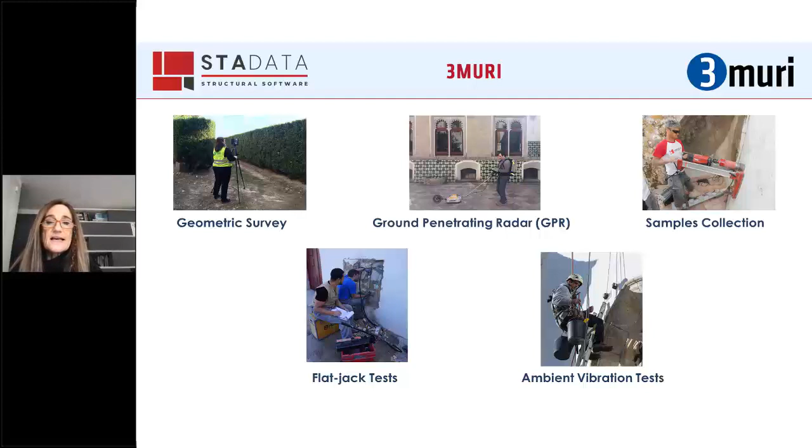And for the experimental campaign, we started with a geometric survey with a laser scanner and a Falcon 8 Plus drone. We have performed ground penetrating radar surveys, sample collection for the masonry, flat jack tests, and ambient vibration tests.

From the point clouds obtained with the laser scanner and the drone, a 3D BIM model was developed in Revit, which includes, beyond the geometry, obviously, attribute data of various types assigned to each of the elements of the BIM model. So we have included in the final model historical documentation, description of materials, construction stages, information from experimental in situ tests, and even the main outcomes from the seismic assessment analysis that we have performed in all the palace.

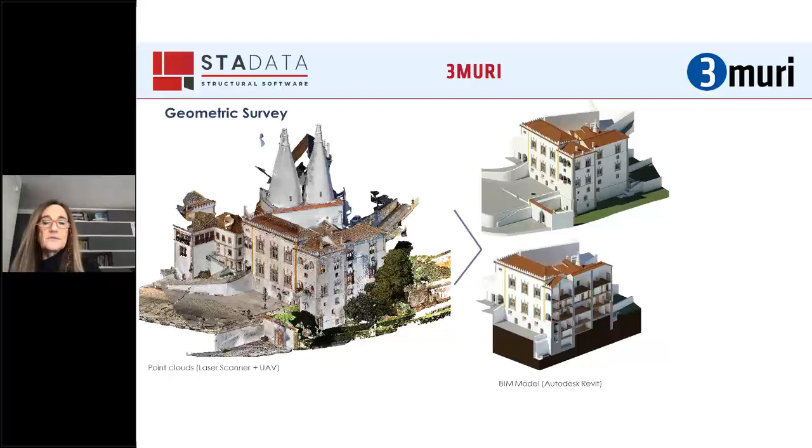In this slide, you have only one wing of the palace, the Manueline building, and a cut and the 3D model represented on the right side of the slide. So from the laser scanner of the outer and inner surfaces of the palace, it has been possible to obtain an incredible 3D definition of the geometry of the structure. And to illustrate this, just some results of these outcomes.

So what we have is the complete geometry of the two massive conic chimneys that we have in the palace, the possibility to be sure about the thickness of some walls which connect different parts of the palace, just to illustrate the chapel and the kitchen, where the width varies completely along the length of the wall, or to detect some curved walls that it was impossible to get from other surveys without using laser scanning.

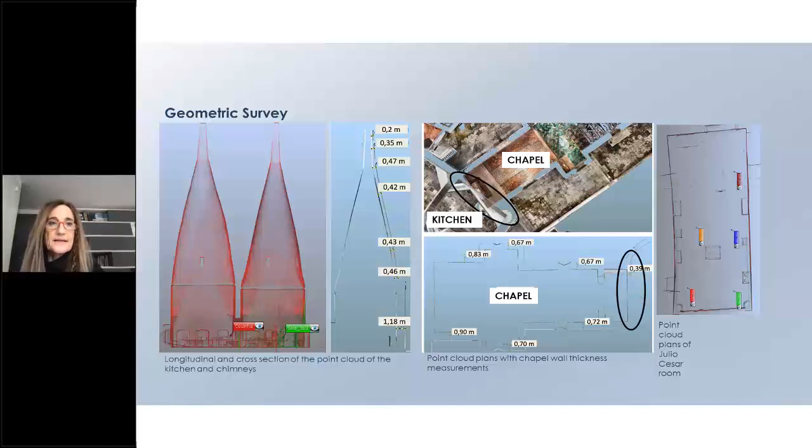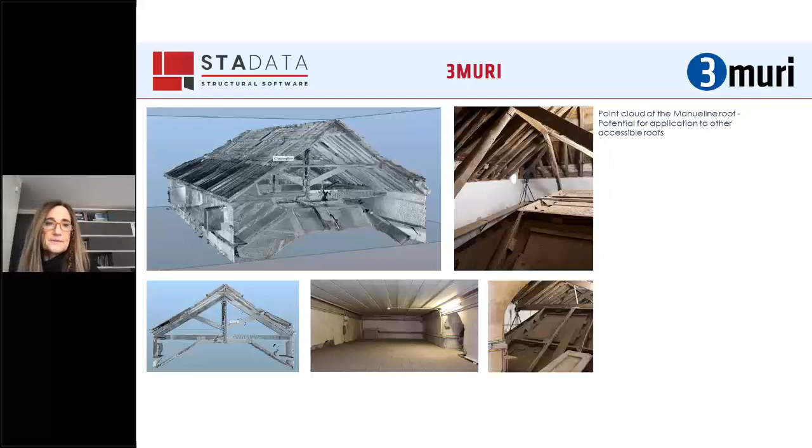And I'm completely sure that obtaining the correct geometry is crucial for the calibration of numerical models and for the adequate seismic assessment and seismic performance of this type of structures. Thus, for this type of complex masonry buildings, I think this is the correct way to get the geometric properties of the structures.

As far as the GPR survey is concerned, we have performed these tests not only in some of the walls where we have removed some samples, but also in all the pavements with vaults, just to be sure if they are infilled or not. And in some walls that were built against the rock, just to be sure how the connection was between the wall and the soil and the rock.

We have used different frequency antennas, and with these we were able to get some important information and to discover some construction techniques, some types of materials, anomalies like the presence of voids, cracks, or even water.

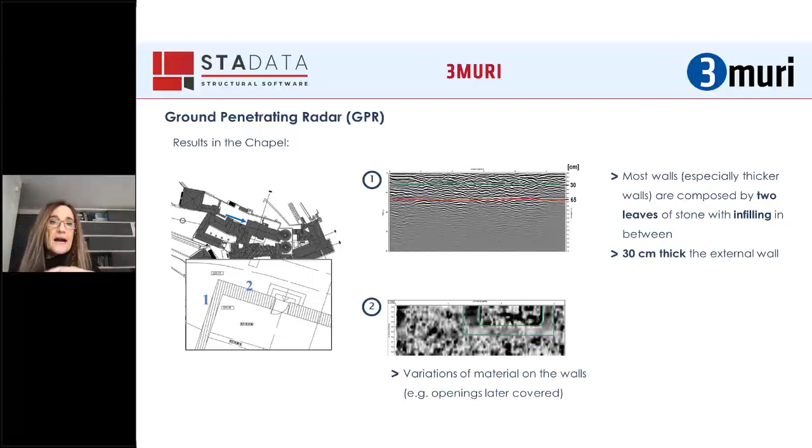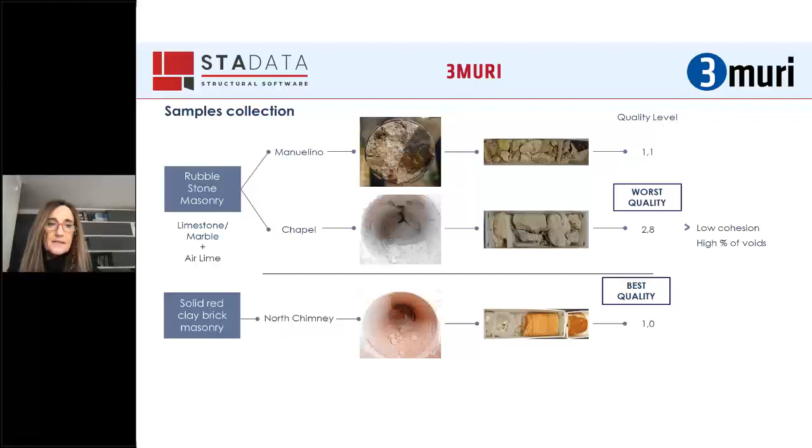For the characterization of masonry, we started with some sample collection. So it's a qualitative characterization, of course. The location was chosen on the main structural walls that characterize the principal periods of construction of the palace, of course, being aware of the countless limitations that we have in a palace, because of the existence of tiles, of paintings, so it's rather tricky to choose the place to get these samples of masonry.

The flat jacks were carried out preferably in the same walls where we have removed the samples of masonry, and if not possible in the same wall, in walls very close to the walls where we have removed the samples of masonry.

And the objective was to characterize the mechanical properties of masonry. It is worth mentioning that the inspection windows that we obtained before carrying out the flat jack tests allowed us to proceed to the masonry qualitative evaluation. So it was really very important for the qualitative evaluation of the masonry.

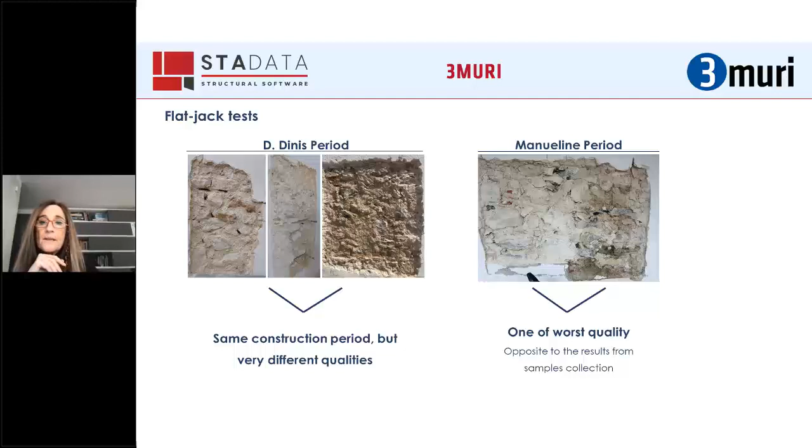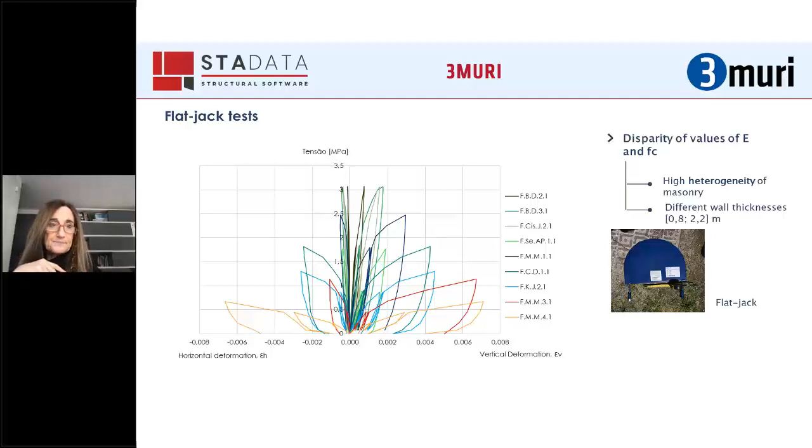A campaign of ambient vibration tests was performed in some of the palace bodies, chosen for their structural importance, existence of damage, and history. These tests allow us to identify the dynamic characteristics or dynamic properties, frequencies and modes of vibration, which in turn were crucial for the numerical calibration of the models.

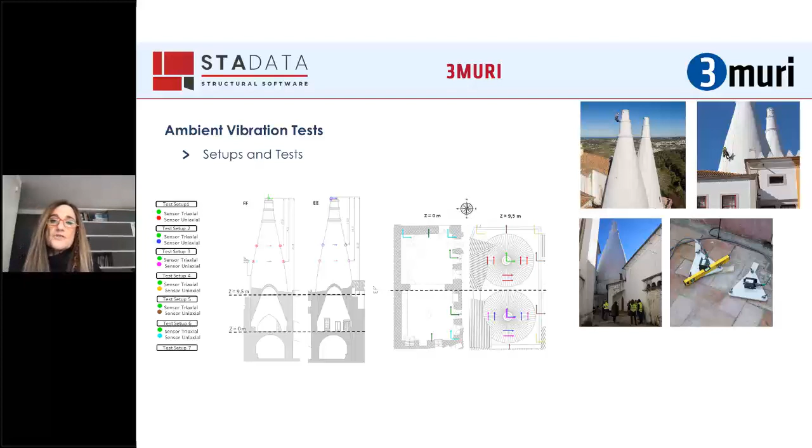The locations of the experimental in situ tests were represented in the BIM model. So you have here the plan view of the Manueline building, and the main results obtained linked to the model or added to it as attributes. So we have here some images of the Manueline building and the tests that we have performed in this building.

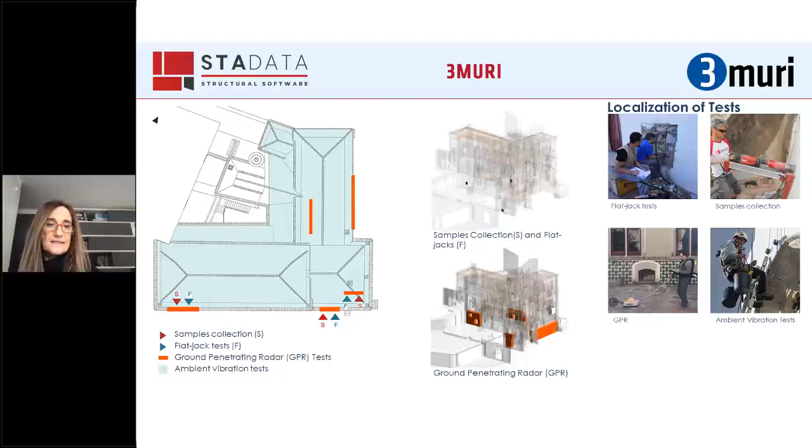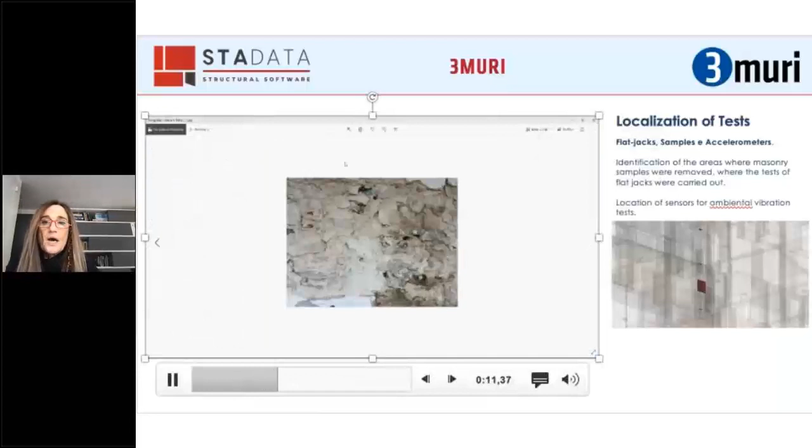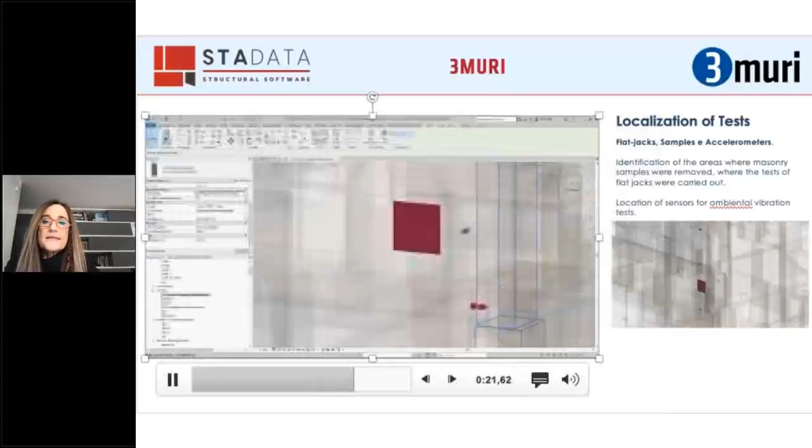This film shows how the information related to the masonry samples, flat jack tests, and the ambient vibration tests have been inserted linked to the BIM model. We have the identification of the areas where the masonry samples were removed, where the flat jack tests were carried out, including some photos and the main results reached. So for instance, for the ambient vibration tests, location of the sensors and the modes of vibration have been considered and included in the BIM model.

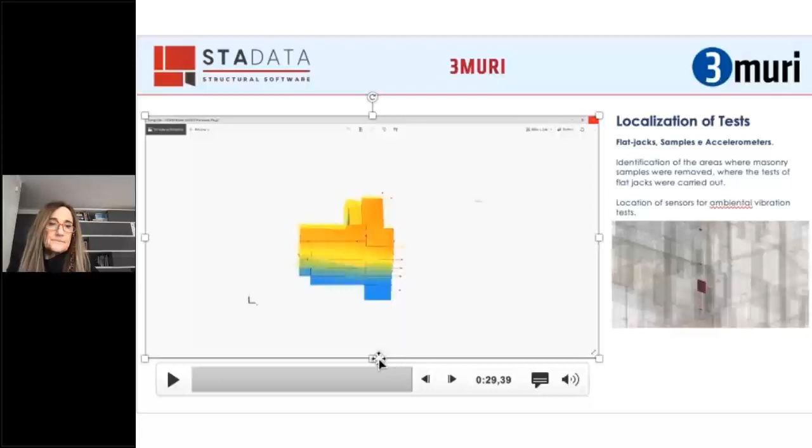In the BIM model, all the floors and walls where the GPR tests have been performed were identified, and it was really important, and the main results as well. As you can see here, linked to the BIM model, the report with the main results of these GPR tests.

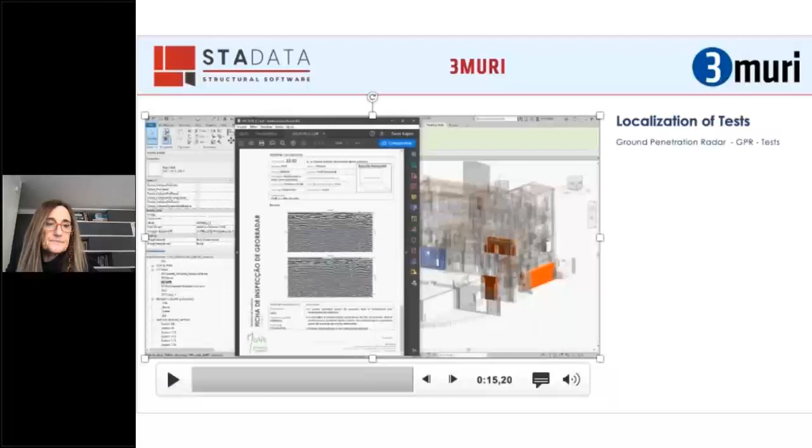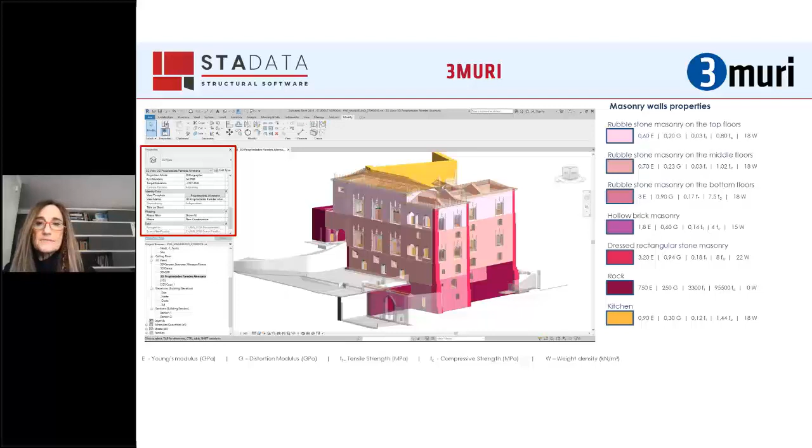So let's move now to the definition of the seismic assessment itself and numerical modeling of the palace. The definition of an effective nonlinear model for the seismic analysis of masonry structural elements represents a crucial step, as you know, towards a proper seismic assessment of existing masonry building structures. For the seismic assessment of the palace, we have considered the in-plane and out-of-plane responses of the masonry, and we have performed nonlinear analysis.

Considering the size and complexity of the palace under study, where this figure is really illustrating the complexity of the palace, I do believe that the macro modeling approach is the tool applicable to large scale computations. Thus, in this study, the seismic behavior was assessed by performing nonlinear analysis through the 3Muri program. This palace, as I have already mentioned, is characterized by an aggregation of bodies, quite clear in this image, intensely affected by their dynamic interaction due to the shared boundary conditions. You have all the buildings sharing with each other some boundary walls. The structural model, of course, needs to consider the effects of those interactions.

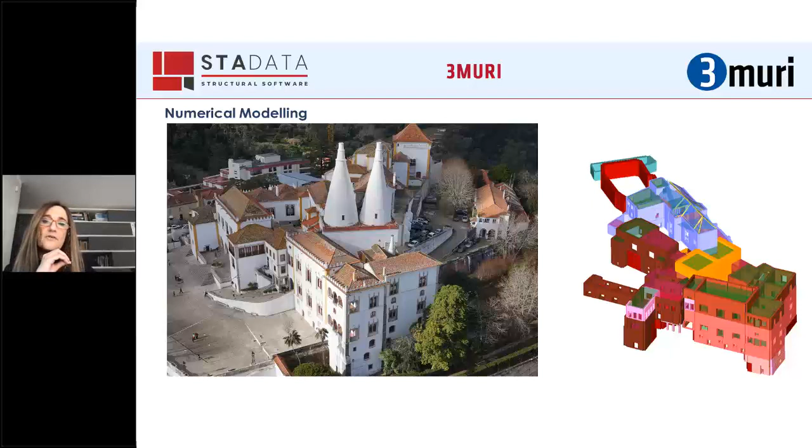At the beginning of our study, a unique global model of the whole palace in the 3Muri program started to be developed, but due to the structural complexity and dimension of the palace, developing a unique model proved at that time to be computationally demanding, and we got significant convergence problems, and it was almost impossible to calibrate our model based on the experimental results with a unique model. So we decided to give up. In the right side of the slide, you can see the model when it was decided to stop the development of a unique model of the palace.

Therefore, separate models were developed and calibrated, considering all the time the effect of the adjacent buildings and taking into account the field survey and results of the experimental campaign, mainly the ambient vibration tests. They were crucial for the calibration of the different numerical models. So we have the identification of all the bodies that we considered in this study with the names that we gave to all the bodies.

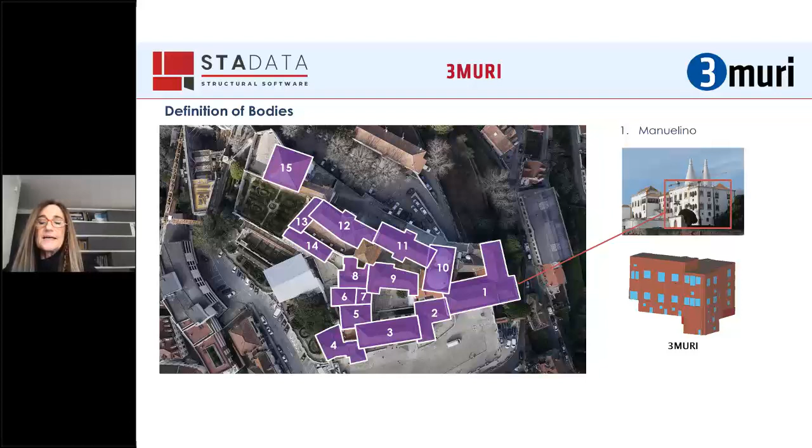I have to say that among all these units, unit 1, the Manueline building, and unit 10, which corresponds to the kitchen with these two high chimneys, were the most challenging ones, and this was due to different reasons. So if we move to the Manueline building, I have to say that this challenge was mainly due to the dimension of the building, irregularity in plan and in height, different levels, walls without continuity in height. So these were the main reasons why it was so difficult to reach the final model of this wing of the palace.

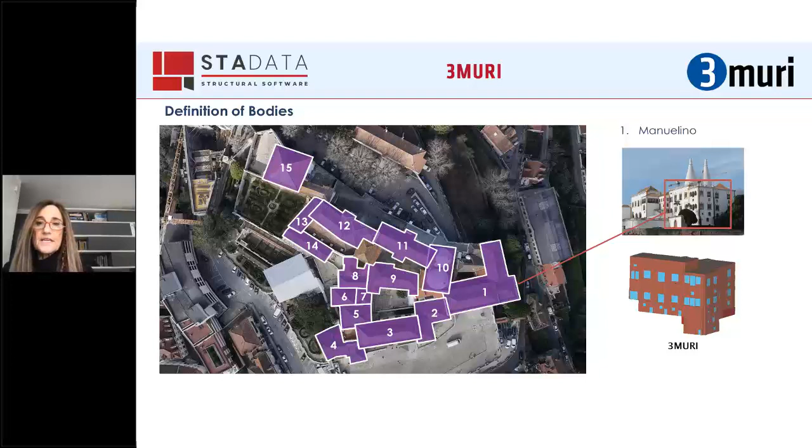For the kitchen, the unit 10, this is mainly due to the presence, of course, of the two massive chimneys with a conic configuration. In this case, we have used different softwares. We start with SAP 2000, and the main reason was trying to have a preliminary outcome, a preliminary dynamic characterization of the building and of the chimneys, because this was rather important to perform the ambient vibration tests and to define the correct localization of the sensors in height. So basically, this was the purpose of developing a SAP 2000 model.

Then 3Muri was used, but for 3Muri, of course, we have modeled only the effect of chimneys in our building numerical model. We have considered all the masses that we have due to the presence of these massive chimneys, and the Abaqus later, of course, because we want to study the behavior of chimneys and to get the damage pattern for different seismic intensities of the chimneys, and this was not possible with 3Muri.

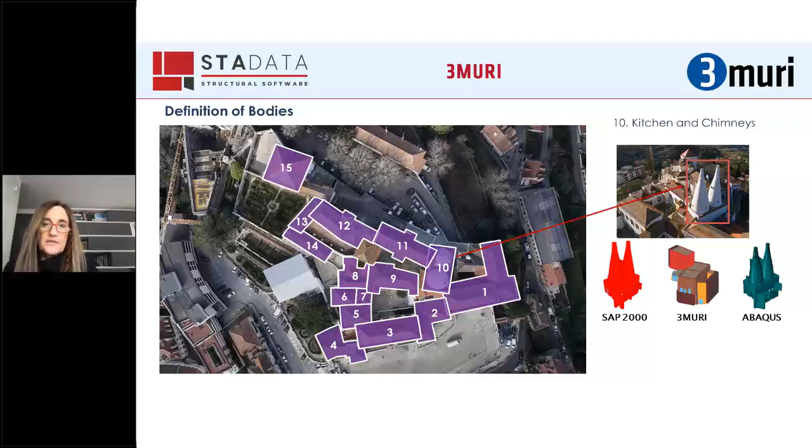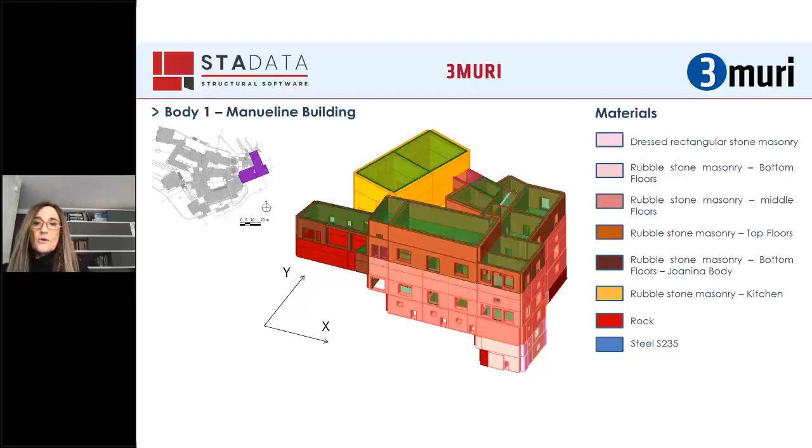For the global seismic assessment, taking into account the in-plane behavior of the walls, we have performed nonlinear static analysis with the 3Muri program. So in this slide, it is represented the damage pattern for the ultimate displacement of pushover analysis for the load applied in both directions, X and Y directions. In fact, the distribution of damage of different masonry walls is represented for the near collapse limit state. This extreme situation allows us to identify the most vulnerable structural masonry walls and the type of behavior that we are expecting, shear or bending controlled behavior.

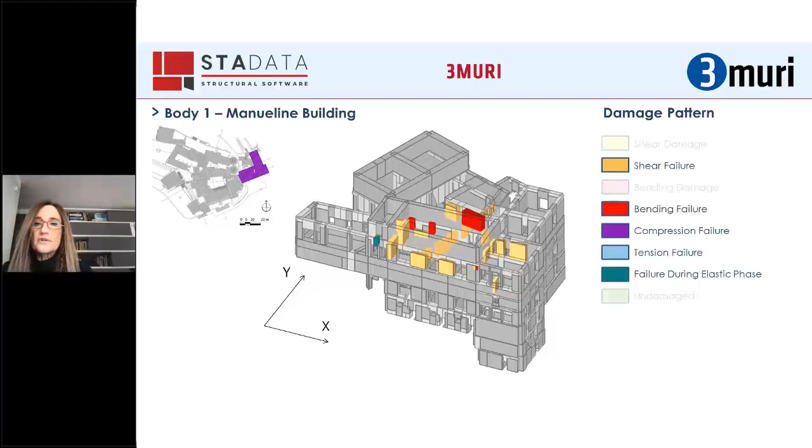So looking at this, of course, we have significant shear damage and collapse in some of the piers at this intermediate level. So we decided also to represent the most vulnerable masonry walls as identified in this slide, just the walls that are the first ones in that building that are going to collapse.

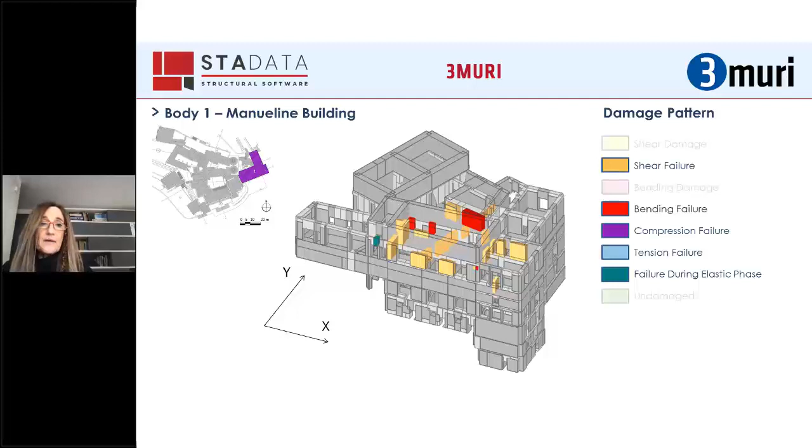And we have also considered the out-of-plane response of the building. The out-of-plane response was evaluated by nonlinear kinematic analysis with the 3Muri program with the local mechanisms module. But given the very good conservation of the palace in general, no cracking state has been acknowledged. So the identification of possible out-of-plane mechanisms was based on the geometry of the building and assumptions related to the quality of connections between orthogonal walls and the roof, and between the walls and the floors, the layout of openings, constructive details, and restraints given by the structure such as the presence of tie rods. All these have been taken into account to define the mechanisms that have a higher probability of occurrence.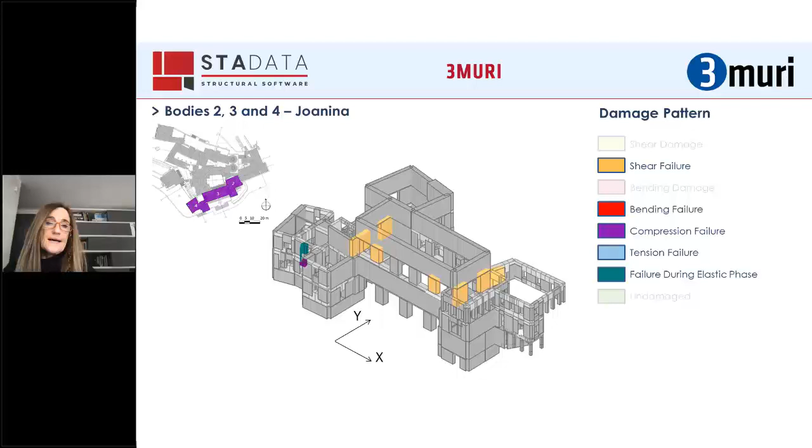And again, the out-of-plane behavior has been considered as well, taking into account exactly the same factors that I have already mentioned. We have defined different probable mechanisms, and we have studied this out-of-plane behavior.

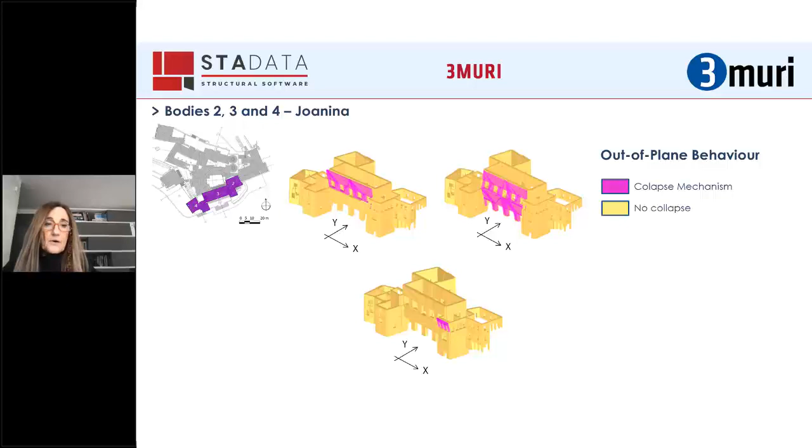So, to finish my presentation, just some very final comments that I would like to give. Due to the complexity of this cultural heritage building, the seismic assessment poses a strong demand on structural engineering skills and, of course, on the available structural analysis techniques. The procedure herein followed seems capable of providing a reliable seismic assessment of such complex structures. In my point of view, it's a good compromise between computational effort and guaranteeing a trustworthy assessment.